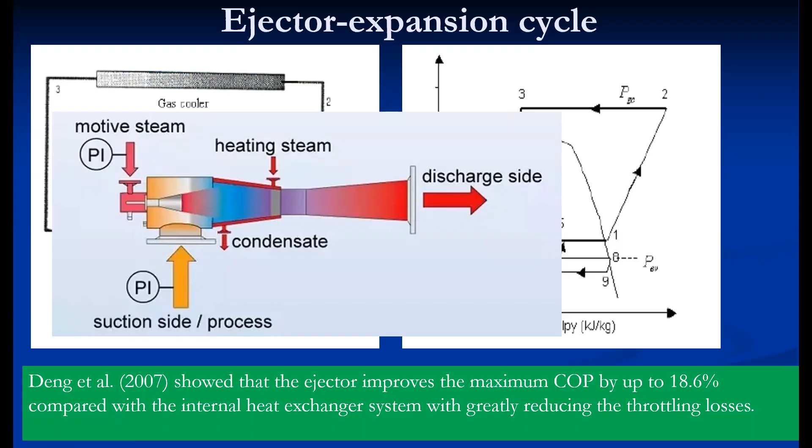So the main function of this ejector is to expand the gas refrigerant from the gas cooler isentropically. In addition to this function, it also assists the compressor. The function of compressor is to suck the refrigerant from evaporator and also to increase its pressure. The suction of refrigerant from the evaporator is done with the help of this ejector, and also a slight pressure rise happens in the diffuser section. So it assists the compressor in these two functions, and that's why the compressor work is slightly reduced.

Now we'll discuss the cycle right from the beginning. This is a conventional way of explaining any vapor compression cycle, that is the starting point is the inlet of the compressor. So point number 1 is on the saturation curve, because it is connected to the separator, which consists of a mixture of vapor and liquid. The vapor is essentially a saturated vapor, and liquid is also essentially a saturated liquid.

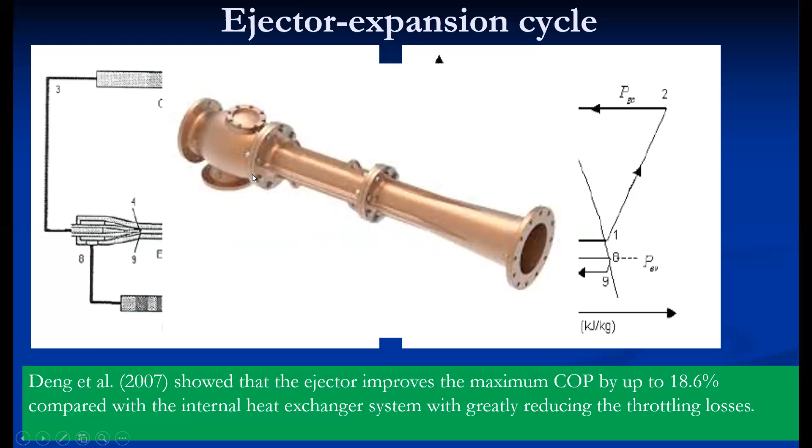This is a pictorial view of ejectors, which is preferably made of copper material, but sometimes it is also made of plastic material. It's a small component, and it also saves space. So this is coming out as a potential modification of the transcritical cycle. This is the fourth modification.

Then the fifth modification or fifth type is the vortex tube expansion cycle. In this particular cycle, the vortex tube is the main device. So this is the vortex tube. Like the ejector, it has three inlets and outlets: one inlet and two outlets. So let me explain the function of the vortex tube.

A vortex tube consists of a small tube where air or any gas enters tangentially. When it enters tangentially, it creates vortices. So when the compressed gas or compressed air enters, due to this tangential entry the vortices are created. This is the outer core, which flows towards the right, and there is a control valve provided at the right side. Due to this control valve, this outer core returns, and that is called the inner core. So there are two cores developed in the vortex tube: outer core and inner core.

The outer core absorbs the heat from the inner core. So the inner core becomes cool, and the outer core becomes hot. Depending upon the openings, the hot gas or hot air exits from this particular exit. So this is the hot exit, and the cold core flows through the inner side and becomes cold because of dissipation of heat to the outer core. This core is made to flow through the orifice, so its temperature further decreases, and this cold gas flows through this exit. So there is one inlet and two outlets, one hot outlet and one cold outlet.

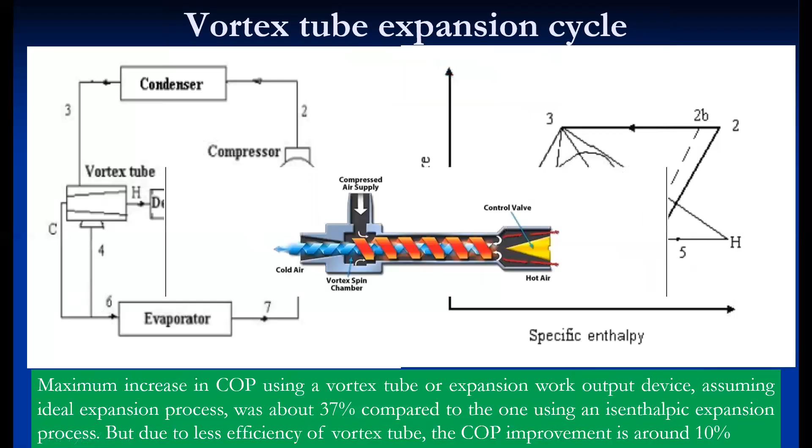So this is the vortex tube. This is a pictorial view of the vortex tube. It looks like it is made of copper or stainless steel, mild steel. So let me explain the cycle again. We start from point number 1, that is the compressor inlet.

So compressor inlet, unlike the previous case, the compressor inlet is not on the saturation curve because it is a mixture of saturated vapor coming out from the evaporator and superheated vapor coming out from the vortex tube. So the mixture state is not saturated, it is slightly superheated. So point 1 doesn't lie on the saturation curve, it is slightly in the superheated zone. So this is point number 1.

So 1 to 2 is the compression in the compressor. Then 2 to 3 is the desuperheating part. So correct this. This is not a condenser. This is a desuperheater or gas cooler. So in the main diagram, the notes are already provided. You correct this. This is a desuperheater. Then 2 to 3, that is the desuperheating part.

Then at point 3, it enters into the inlet of the vortex tube. When it is made to flow through this vortex tube, it expands. But there are two outlets, one hot outlet and one cold outlet. So the hot outlet is a superheated vapor, denoted by this H point. And the C point is the saturated vapor. So these are the two outlet processes.

And we cannot explain this with the help of thermodynamic processes. It is a totally irreversible process. So we cannot describe this process, whether it is an isentropic process or isenthalpic. So only by locating the points, we join point 3 to H and point 3 to C. That is the cold end and hot end.

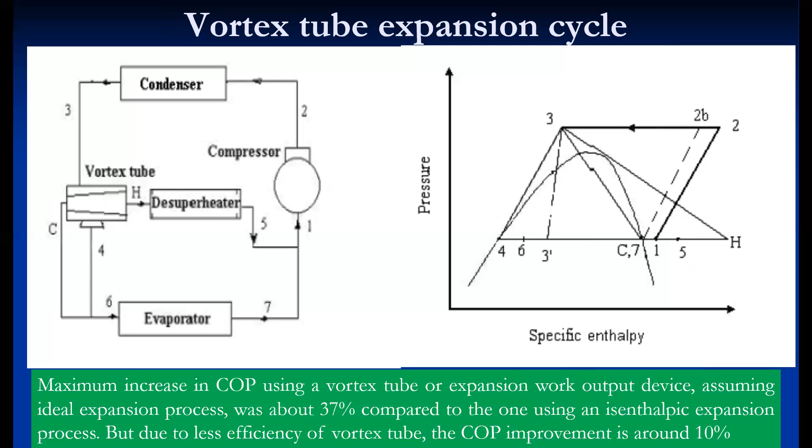But the vortex tube is a device with very low efficiency, generally 0.2 to 0.3. Because of this, the COP improvement is around 10% only. The size of the vortex tube is very small, so it doesn't occupy much space. So it is still a recommended modification. So this is the vortex tube expansion cycle, where the vortex tube is used as the main expansion device. In the previous one, the ejector is used as the expansion device.

Then the sixth and final type, that is parallel compression economization. In this case, the compression happens simultaneously. The gas coming out from the evaporator and the gas coming out from the flash chamber are compressed in a single compressor simultaneously. That's why it is called a parallel compression type transcritical cycle.

So again, we start from point number 1, at the inlet of the compressor. 1 to 2 is compression of the gas coming out from the evaporator up to the gas cooler pressure, that is point number 2. Then 7 to 8 is the compression of the gas coming out from the flash chamber.

So 7 to 8, that is compression of the gas coming out from the flash chamber. And 2 and 8 mix, and the resulting mixing point is point number 9. So we cannot locate point number 2 and point number 8 on the schematic diagram, because at the outlet the mixture is coming out from the compressor. So point number 9 is the mixing point.

So 9 to 3, again the gas cooling in the gas cooler. So point number 3, that is constant pressure gas cooling. At point 3, it enters into the expansion valve. So the refrigerant is expanded up to the intermediate pressure, that is the pressure of the flash chamber. So at point 4, it enters into the flash chamber where it separates.

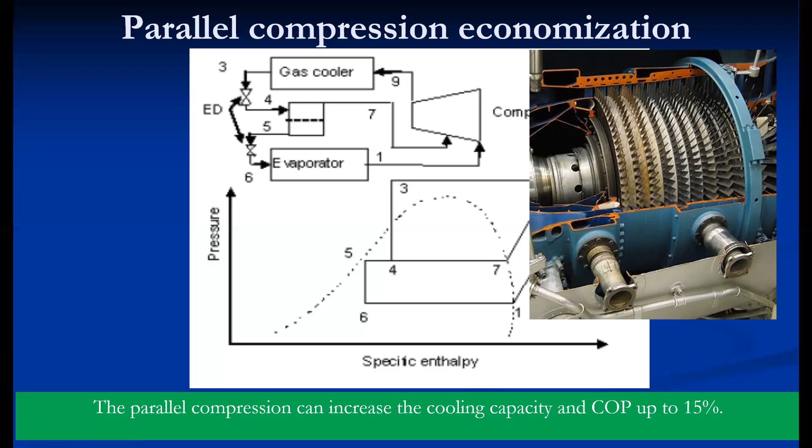So this type of construction is used in the compressor, and if we have to use this particular configuration or modification, then an axial flow compressor needs to be used, because such a facility we cannot develop in reciprocating compressors as well as centrifugal compressors. This type of modification increases the cooling capacity up to 15%. So this is the sixth and final type of modification. So there are 6 types of modifications we have discussed.

And if we compare these 6 types of modification on the basis of COP improvement, it is found that the turbine type or expander type transcritical cycle produces the maximum improvement, around 35 to 40%. That is because of the positive work developed by the expander. Because of that added positive work, the work input from the prime mover is reduced as well as the refrigerating effect increased. Because of this double effect, the highest improvement is seen in the turbine type, and the lowest in the internal heat exchanger type, and others are in between.

So with this, we have finished all 6 modifications of the transcritical cycles, and all the modifications are generally made to shift point 4 towards the left, as we discussed in the first lecture. So these are the 6 modifications.

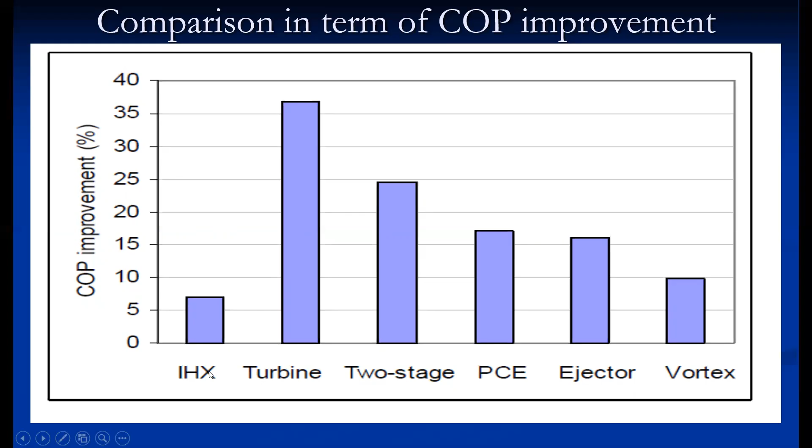At the end of this particular topic, you should be able to explain the working of the ejector and ejector expansion cycle. Secondly, you should be able to explain how the vortex tube works, and the vortex tube CO2 cycle. Then how the parallel compression system works, what its limitations are, and which type of compressor is generally suitable for this type of compression. And you should be able to quote the most efficient CO2 refrigeration system, that is, the most efficient modification.

That is obviously the expander type. But there are some physical constraints of the expander type. Theoretically, it proves that this type of modification produces the maximum improvement.

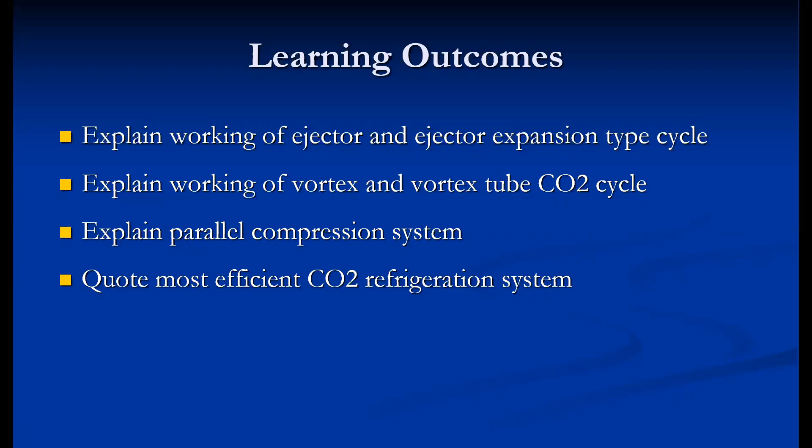So with this, we have finished the first segment of unit number 1, that is advanced vapor compression systems. We have finished the transcritical systems, the basic transcritical cycle, and its 6 modifications. From an exam point of view, these modifications are generally asked, that is, the construction, working, and important features of these modifications. With this, we have finished the first segment.

From the next lecture onwards, we'll discuss the second advanced vapor compression cycle, that is the ejector-based refrigeration cycle. It is a compressor-free refrigeration system, and there are again 4 to 5 modifications used there, which we'll also discuss.